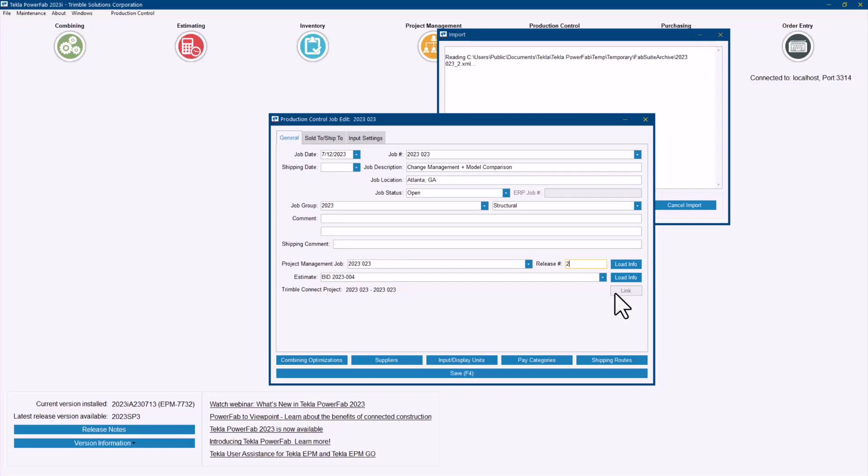Now, as you can see, this job is already linked to a Trimble Connect project, so there is no need for me to do that because this, again, is a subsequent import. That's usually done the first time that you import a file. So let me go through the normal add and replace and select the usual mapping for the user defined fields that you handle for drawings and part user defined fields.

Now, as you can see here on the log, some of the changes were already starting to be reflected, and then the change summary screen comes into action. As I have mentioned before in the presentation, someone that is familiar with the project should pretty much read what's going on from this screen, right? Just by looking at this, I can see that the C5 I won't be able to accept that change. That's why by default it's saved for later and put on hold, and that's because it's taken from the stock, right? So that's what the red indicator tells me.

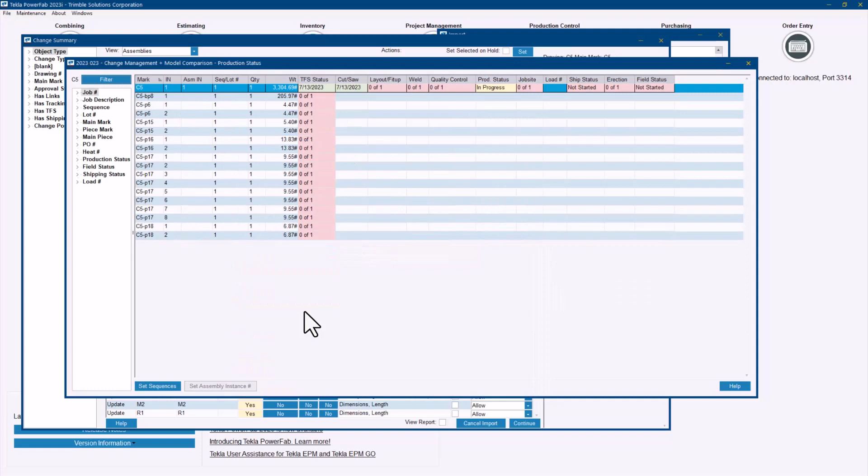That main shape, we can take a look here on what it is. It is wide flange 14 by 145. It was already cut and it's getting shorter. So I can still take the decision later if I can reuse that material or not, right? But for everything else, I can see the different statuses, like most of the material has been purchased. Only a few items have some tracking information.

I can go and see, for example, this that it's changing from 21 by 44 to 27 by 84. That's a serious change, so for sure I won't be able to reuse that material, so I will need to buy new material, for example. Now, again, this is very helpful, and it's what we came up with in Tekla PowerFab 2023. But in 2023i, this is even more helpful because you can see the location of these items. You can see how those items are affecting other areas in your project.

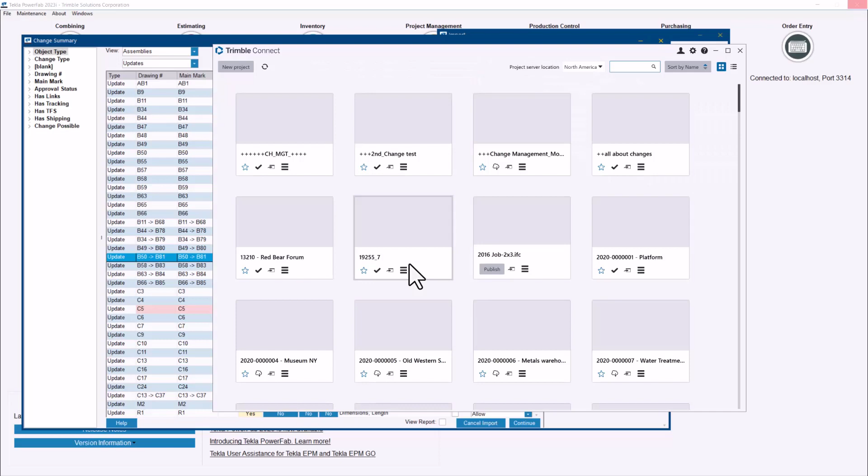So hopefully you have noticed at this point, here on the upper right where my mouse is indicating, there's a select in assembly model option, and you can use the typical right click and then the Trimble Connect default options that we use in most of the modules. So if I go and do select in model, for example, in this beam, you can see that it's going to launch Trimble Connect here in just a moment, and then automatically runs a comparison that will show you how the model changed from the last import that you did. So I'll let it load here real quick.

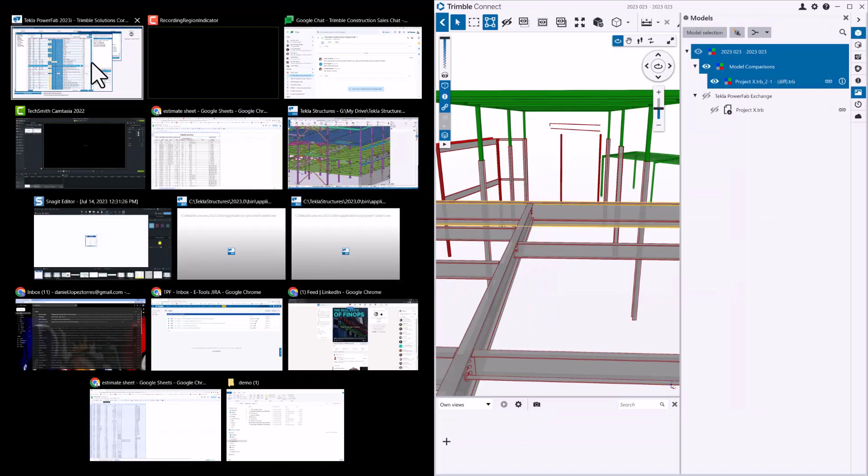There we go. And then it takes me exactly to that beam, right? It's a B81 that's changing from B50. It was a B50 before. Let me actually put this side by side so we can have a better view. There we go. Let me make more room. And there is the B81, right? So you can clearly see here what's happening.

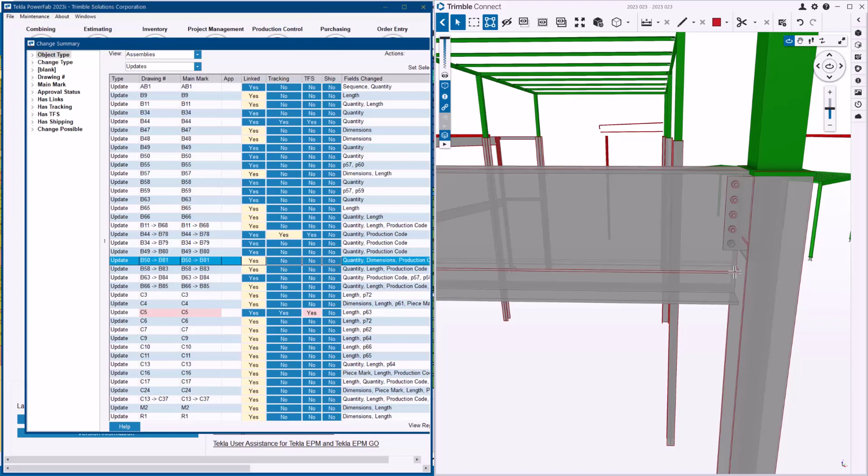Now, in case you haven't used the model comparison before, let me explain this real quick. The red contours are actually what the piece was before, and the gray area is what it is in the latest import, right? So you can see here that it was a 21, I think, beam, and it grew to a 27. You can see how that obviously also affected the size of the plate, and it also moved that stiffener on the column, right? So that's why that's for sure one of the columns being affected.

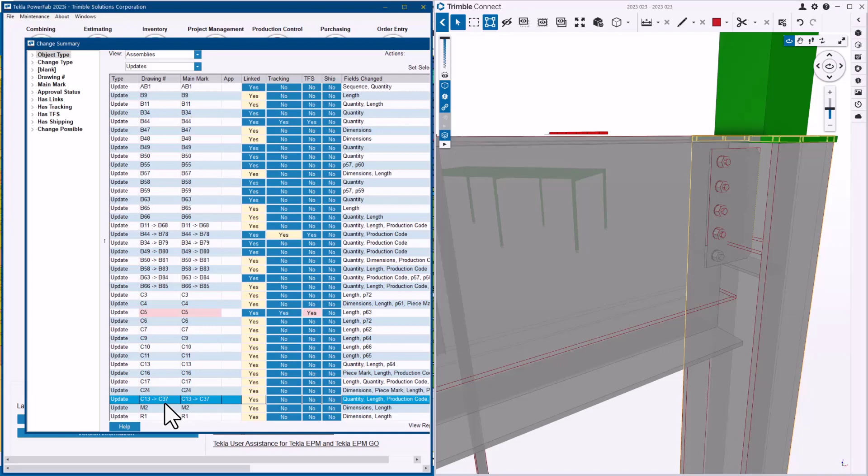I can select that and select from the model, and you can see that that column was a C13 and changed to a C37. So it's really a very, very good graphical way to see your changes reflected.

And then the stuff that you see in green is new assemblies that are being added in this import. So you can see the assemblies affected, the new assemblies that are being added. And then when you see something like this that is completely red, that just means that that assembly is not even in the model anymore. So it was deleted or possibly deleted. So that's why we highlighted it here, so you can analyze that with your detail and take the decision if you need to take that out of the project.

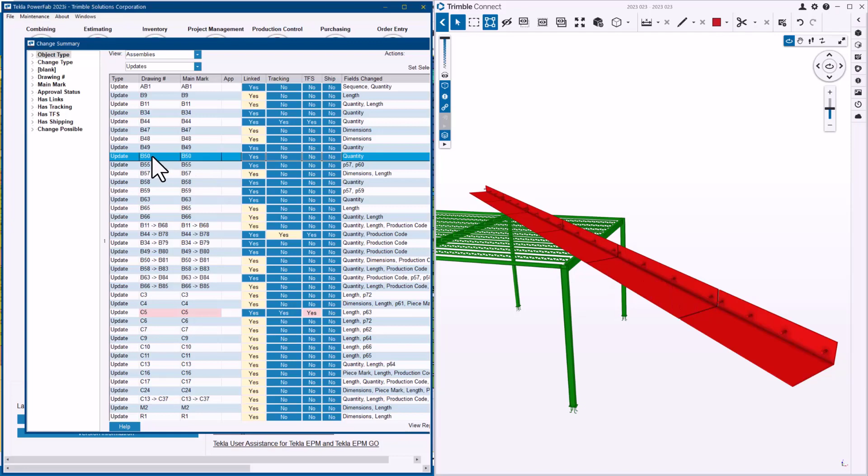So just another example. If I go again to this B50, that is the beam that was changing, that I was showing you as B81. If I do the selection in the model, you can see that it actually takes you to the other assembly that is being affected. So I just wanted to highlight that even if you select one or the other, it will always select the assemblies that are involved in that process.

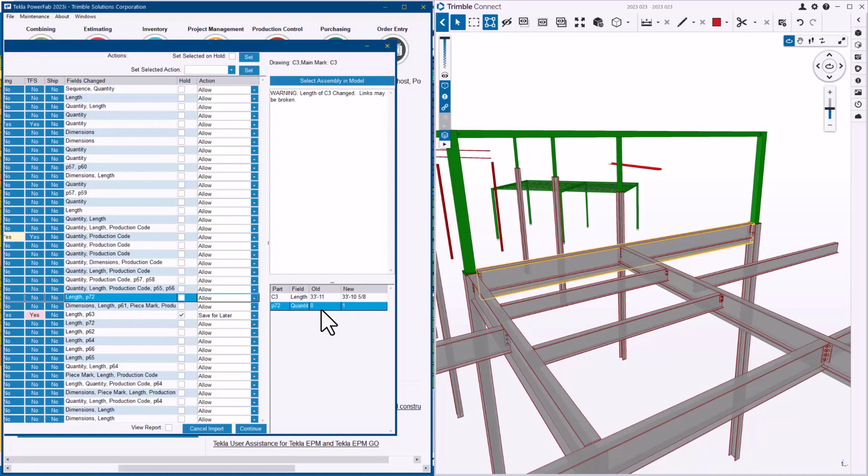Now, one more thing that I want to mention here is this is not just at the assembly level, right? It can actually highlight at the part level. So for example, if I go to one of these columns, like the C3, I can see that the P72, there was none existing before and now it's one. I can actually select that in the model and it will take me to where that plate is located. So you can even utilize the bottom right side panel at the part level and go and see the changes that are being affected.

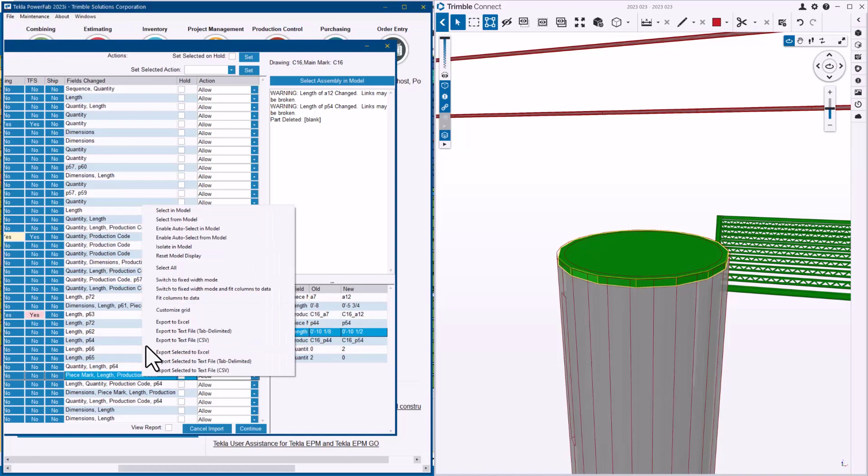Like if I go to one of those, let's see, a change in some of the dimensions, maybe in one of these columns, let me find something more like this one. For example, this is a plate that was already existing and it's changing a little bit in the dimensions. I can go and select that in the model and it will take you exactly to where it's located. So again, it's unprecedented. I truly believe that this will help you entirely understand the changes and the things that are happening in your revisions. So it's a really helpful thing that Tekla PowerFab 2023i has for you.

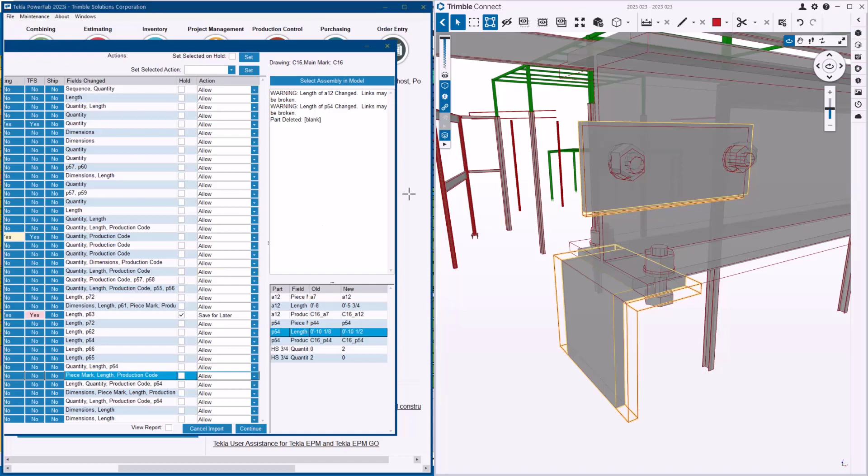Now, the other thing that I want to highlight is that these changes are also available for you to be seen in the model comparison from the pending revisions screen. So let me explain that real quick. If I expand again this screen, let me just go and put a couple of these changes also as save for later, just so I don't have just one. And continue with the import. I will skip the part of the report because we've seen that in the latest version. So I'll just go and show you from the rev queue here in just a moment.

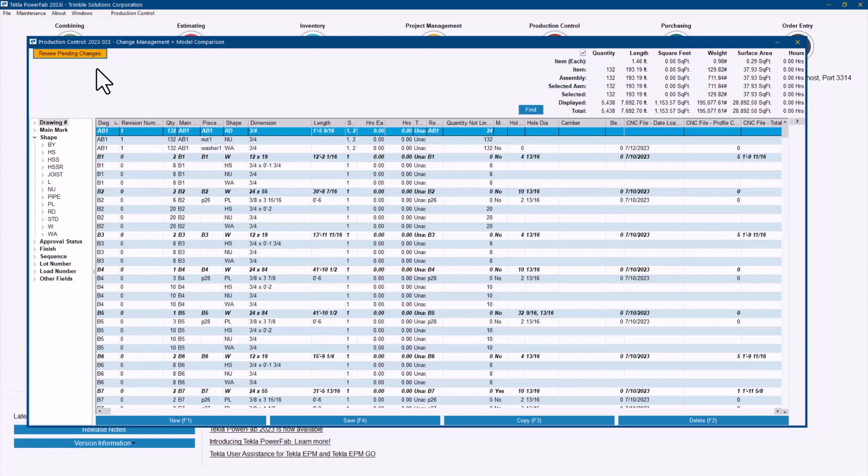Okay. So let me go ahead and open that production control job. It's right here. And as you notice, I have the review pending changes option on the screen because I have a few changes without accepting. So again, if some of those changes were saved for later, then your production manager, your purchasing manager, whoever needs to get involved, can go and check those changes. There are the 3 changes that I didn't accept.

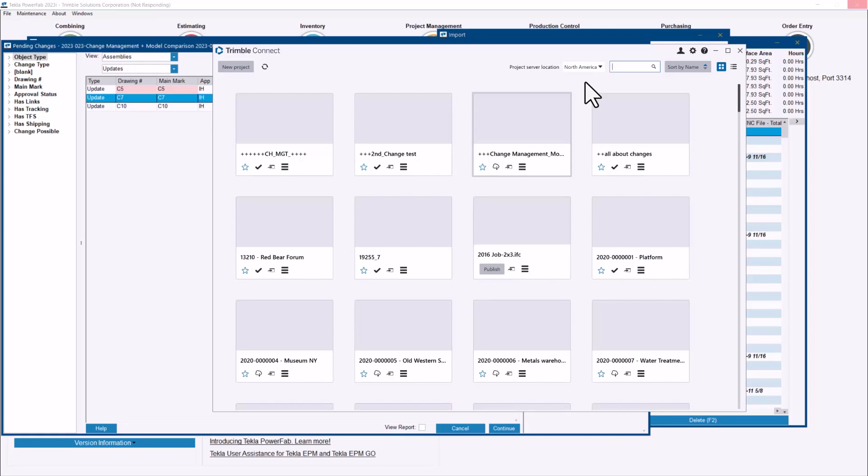Still at this point, they can also do the select assembly in the model option, and you will see here that Trimble Connect will launch again. You can even interact with the 2 models in Trimble Connect, right? The one with the model comparison and the actual latest Trimble Connect model on the same job. But you can see here that it goes and highlights that piece for me again. It shows me where it is.

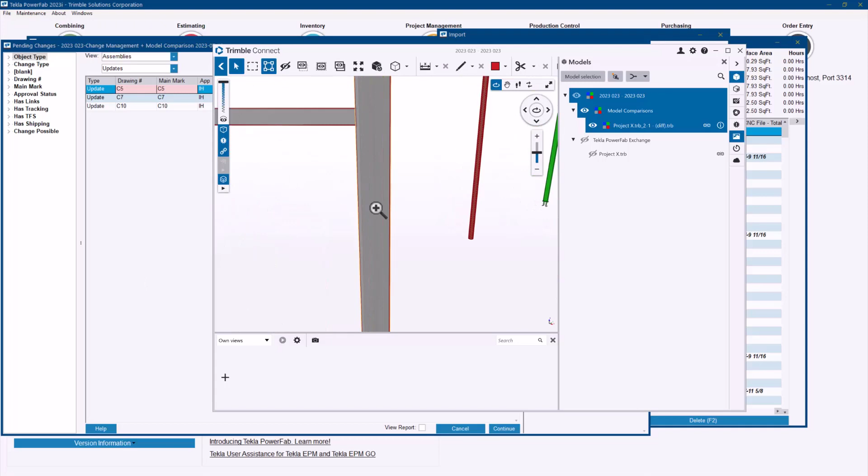Let me hide this one for a moment again. I can see where that piece was highlighted as a change. I can go to the C5 now. Let me pull Trimble Connect again into the screen, and it takes you to that column now. So they can still analyze those changes and take decisions. They can always go back to the latest model comparison and see what's been happening.

So again, this is unprecedented. It's going to be very helpful for steel fabrication companies. Everyone will be able to understand the changes in a clear way. So don't wait too long. Go and download 2023i because I think this is a fantastic tool for you.